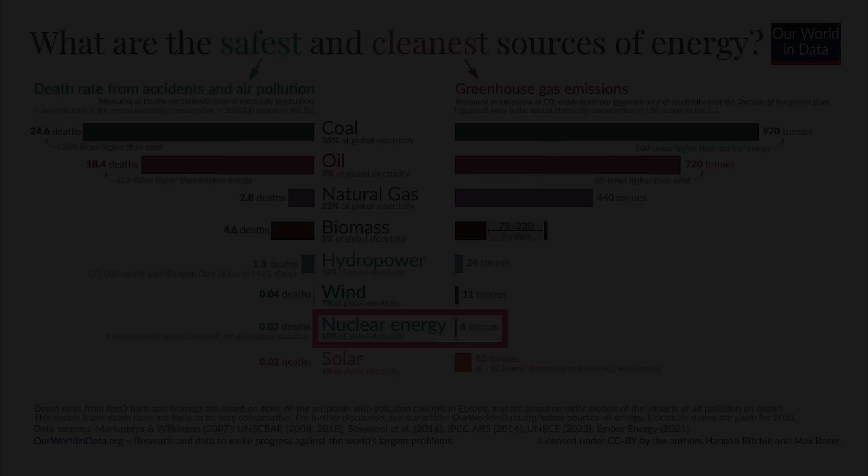For anyone who follows energy, geopolitics, or technology, it's clear that there's momentum building around nuclear energy. It's seeing growing public support, technological advances that could make it cheaper and safer, and it's the absolute champion when it comes to low-carbon energy production. The question is, will that momentum result in a renaissance for nuclear power? That's what I'll attempt to answer with this new video series.

Today we'll start by looking at the bear case for nuclear, and the best example of that is from RethinkX, which has forecasted that nuclear power production will collapse in the 2020s. In my view, that forecast is overly bearish because it doesn't take into account the role that nuclear plays in the overall grid mix, doesn't seem to factor in the cost of existing nuclear generation compared to new nuclear generation, doesn't factor in that nuclear power is the ideal power source for AI data centers, and the exponential growth in electricity demand that's expected from the broad-based push for greater electrification.

Once again, bear in mind that today's video will just address the bear case. In upcoming videos, I'll get deeper into topics like whether nuclear power will be needed when solar, wind, and batteries are a fraction of what they cost today, and the economics of next-generation and small modular reactors.

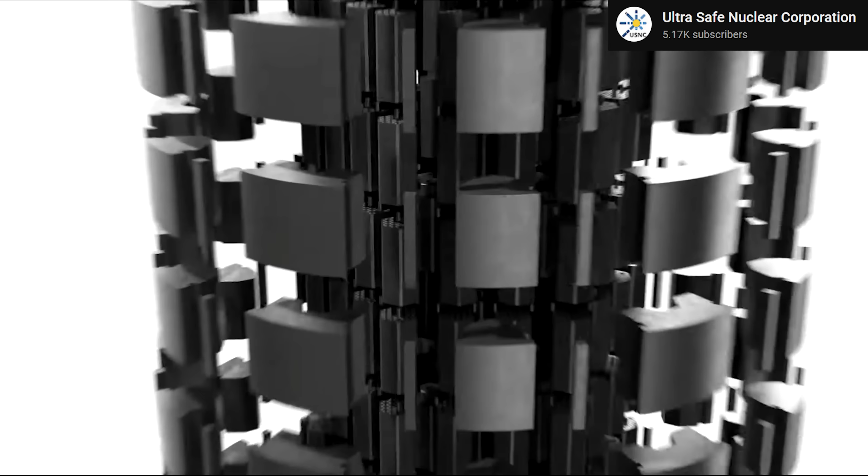To set the tone for this video series, the first point worth covering is that I'm technology agnostic when it comes to energy generation technologies. I only care about using the right tool for the job. That is, I don't believe there's a holy grail of electricity generation that'll solve every use case. So for me, the question is not which energy technology is best, because that's the wrong way of looking at the electricity grid, but rather, what are the use cases and what are the best solutions to each of those use cases? And from there, we can try to determine how much each technology will scale over time.

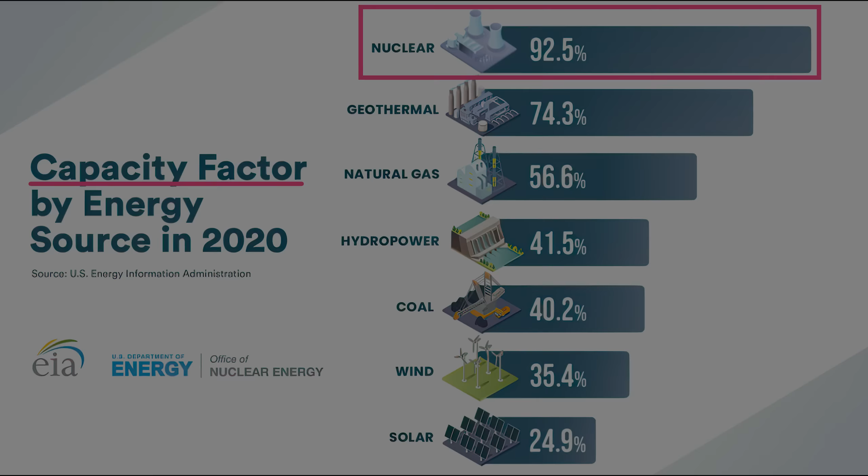In the case of this video series, I'll be focusing on nuclear energy. So let's start by taking a 10,000-foot view. There are three types of electricity generation. The first is inflexible, and the best example of that is nuclear power. The advantage of nuclear power is that it has up to around 90% uptime, which provides a solid foundation for the grid. However, the disadvantage of nuclear is that it has high capital costs. So, in order to be profitable, a nuclear plant needs to run as much as possible.

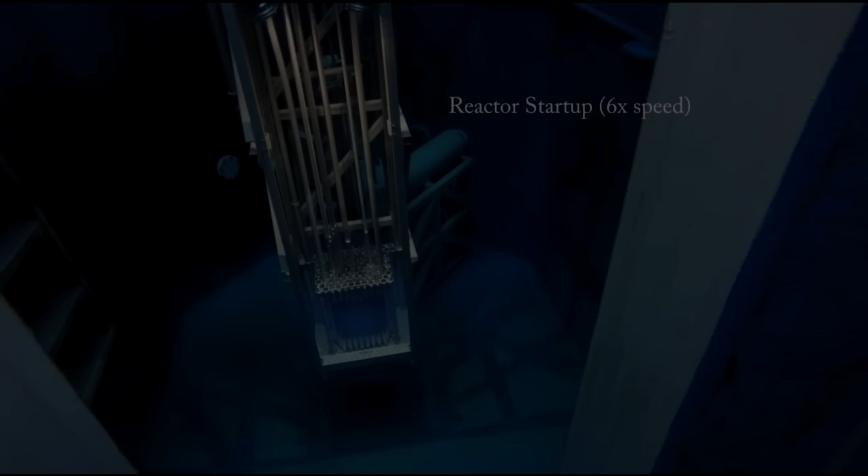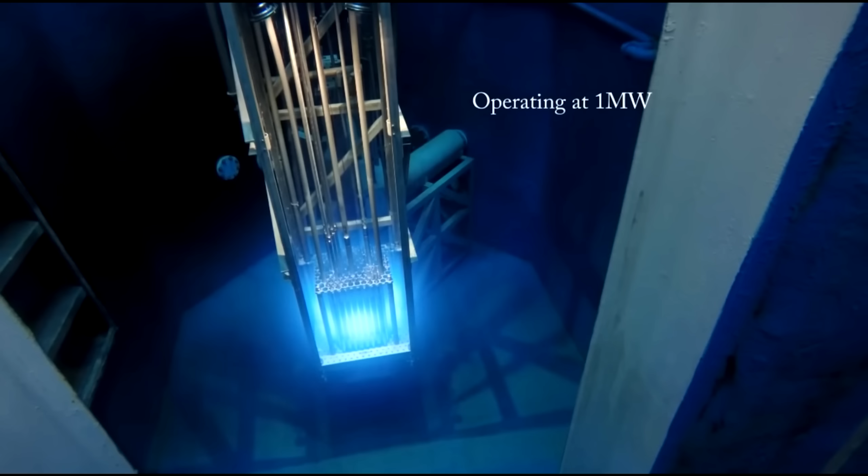Additionally, a nuclear reactor takes days to spool up and days to cool down. That means it's easier for grid operators to run nuclear continuously rather than trying to chase the daily ebbs and flows in power demand by throttling the reactor. The next type of electricity generation is flexible generation, and the best example of that is natural gas-powered plants that can adapt to demand by increasing and decreasing output.

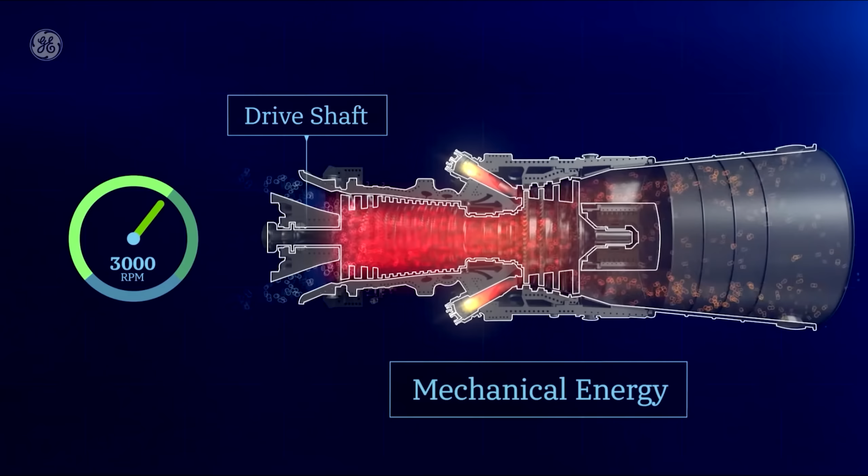There are two types of gas generation. Simple cycle gas generation has low capital cost because it uses relatively simple technology in the form of a gas turbine, but the operational costs are high because they have low fuel efficiency. That combination of qualities makes them perfect for peak power demand because they can sit idle until they're needed, then capitalize on high power costs during peak demand.

Combined cycle gas generation has moderate capital costs because they're more complex. They not only have a gas turbine, but also a heat recovery system and boiler that runs a steam turbine. That results in greater fuel efficiency. That means combined cycle gas turbines are low cost enough to operate as baseload, but they can also ramp up and down quickly with demand to serve as flexible generation.

With those two types of electricity generation, inflexible and flexible, grid operators can meet any demand while keeping costs low by utilizing the strengths of each technology. There's still one more type of generation, variable generation, and the best examples of that are solar and wind power.

They have moderate capital costs and no fuel costs, but they only produce power when the sun is shining and the wind is blowing. That means they're low cost, but in order for them to provide reliable power, they have to be combined with inflexible or flexible generation to fill in the supply gaps, which is called firming.

What all this means is that each electricity generation technology occupies a niche that it's best suited to, and the optimal solution for a reliable grid requires a variety of technologies. That technology mix can vary quite a bit depending on a number of factors like geography, interest rates, fuel costs, and latitude. Coming full circle, this is why I don't believe in a holy grail of electricity generation, and I try to be technology agnostic. It doesn't make sense to become a fanboy of one technology because it's counterproductive.

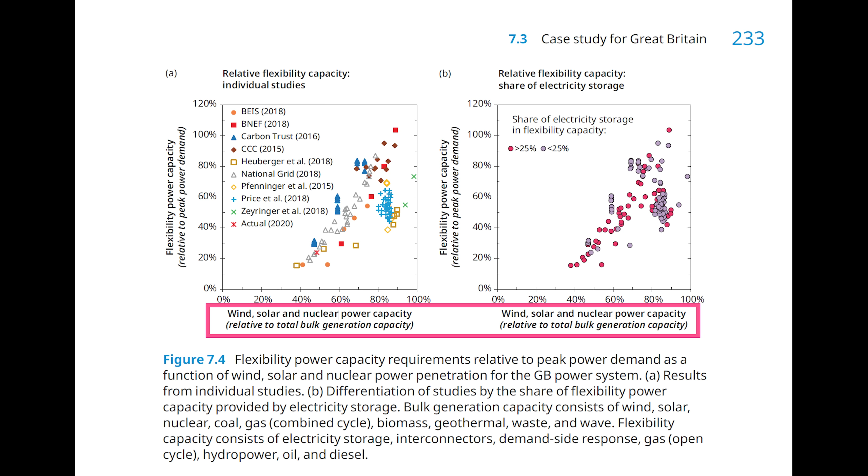For example, some people assume that somehow nuclear power is at odds with solar or wind power, or the inverse, which is that nuclear will make up for the shortcomings of solar and wind power. But in energy systems analysis, they often get lumped together. Why? Because they each have a tendency to produce excess energy. Solar power, for example, will sometimes produce more power than the grid can use on a sunny day. And nuclear power, for example, will continue to produce power at full tilt, even when demand is low. More on that in a moment.

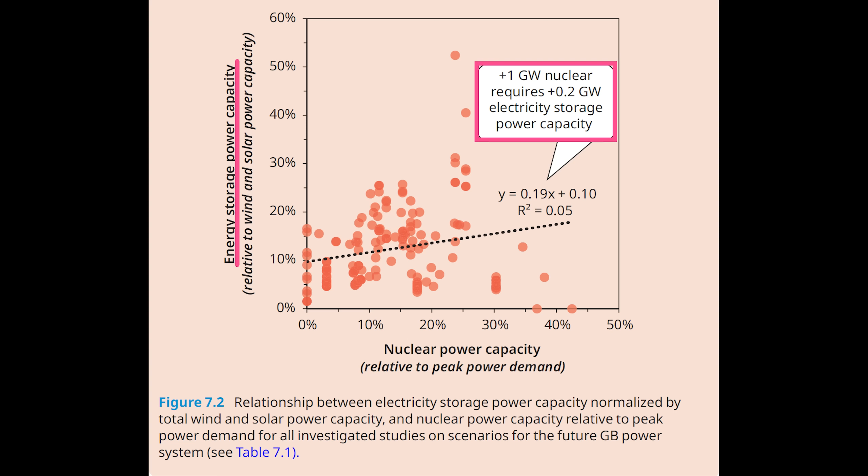What this means is that there's a positive correlation for solar, wind, and nuclear versus energy storage technologies like lithium-ion batteries, which allow the excess energy to be captured when demand and prices are low, and sold into the grid when demand and prices are high. So, the solar and wind provide ultra-cheap power because they don't need fuel. The nuclear provides a reliable baseload for when there's no sun and wind, and the battery storage makes better use of all of them. It's an ecosystem of complementary technologies.

With that context in place, let's zero in on nuclear energy. As I said in the introduction, the most bearish forecast I've seen for nuclear is by RethinkX. They expect nuclear power to collapse by 2030. The core of their argument is that newly installed solar, wind, and batteries are soon going to be cheaper than nuclear power. That means the utilization rates of nuclear plants will drop, causing the cost of nuclear power to skyrocket, which in turn will result in those nuclear plants being shut down. However, there's 4 reasons why that logic may be incorrect.

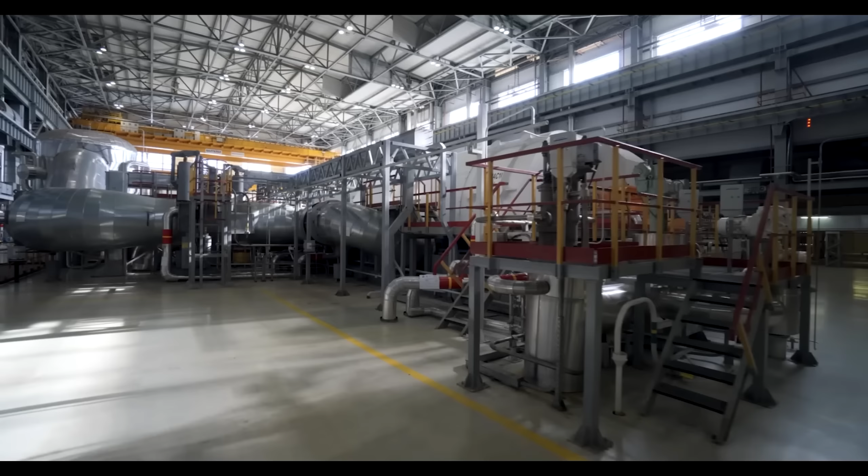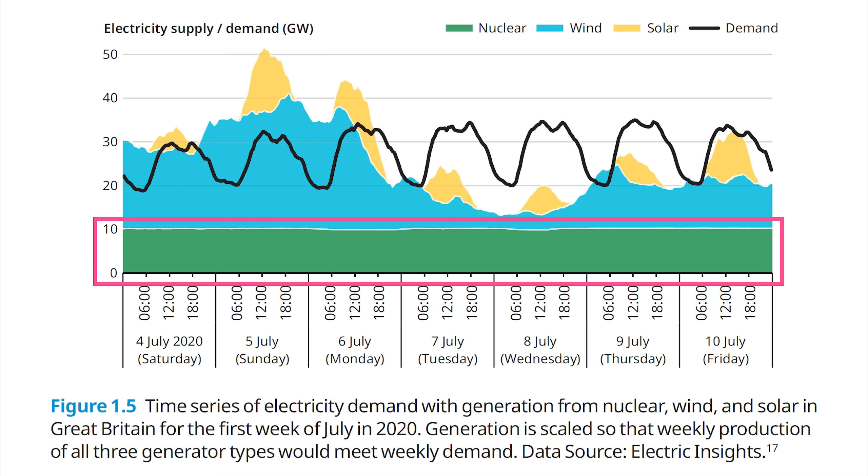Let's take a look. First, in most power grids, nuclear is treated as a must-run generation service, which means it operates at all times. Let's look at how that works in practice. As I said earlier, nuclear can't throttle quickly enough to match power demand. At night or other periods of low demand, that means the nuclear plant has to sell energy cheaply and underbid other generation technologies to continue running. That can often mean running at a loss during those periods, but it still improves the overall economics of the nuclear plant compared to throttling or shutting down. That's because the low fuel costs and high capital costs of nuclear plants mean they lose even more money if they're just sitting idle.

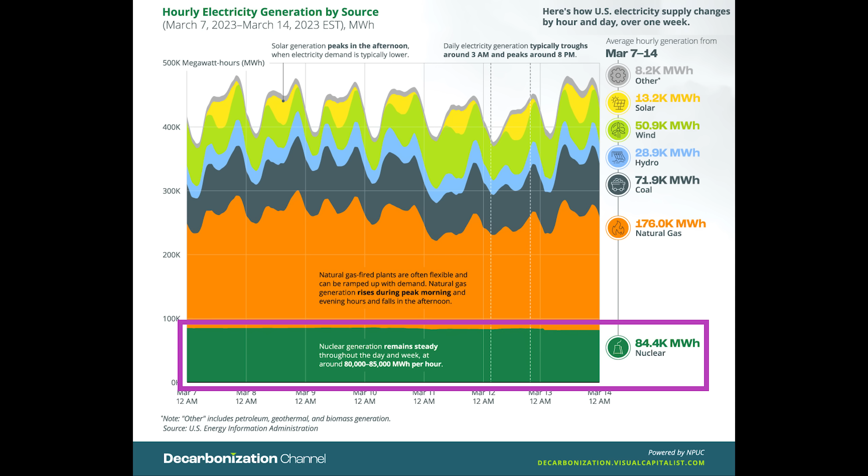As a side note, even if nuclear power is more expensive, the continuous and stable power generated by nuclear plants may be worth a certain price premium that could keep them around on the grid longer than expected. How much that premium is, I'm not sure, and how long it could save nuclear plants from being mothballed, I don't know. But it is worth considering not just the price of electricity, but also the value it provides for grid stability.

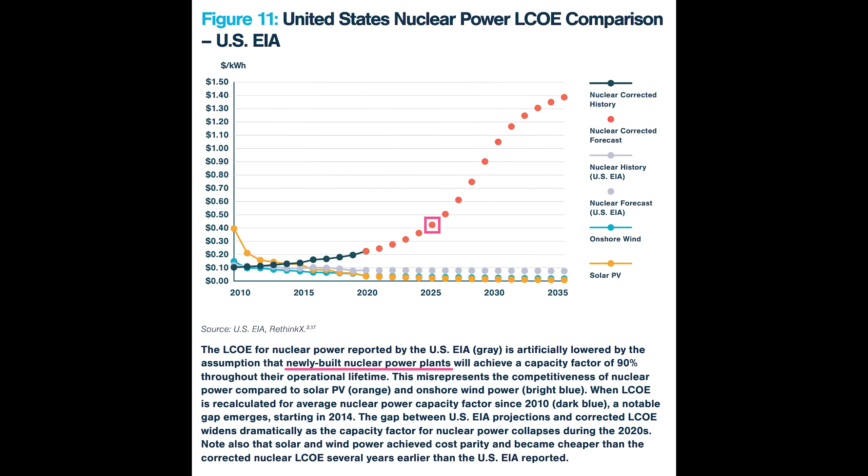The second issue with RethinkX's analysis is that they appear to have focused on new nuclear power plants and ignored existing nuclear power plants, which have vastly different economics. They estimated that the cost of new nuclear generation in 2025 would be about 43 cents per kilowatt hour, or $430 per megawatt hour.

The most recent data we have from Lazard, published in June of this year, indicates that it's turned out to be $142 to $222 per megawatt hour, or 14 to 22 cents per kilowatt hour, so about half the cost that RethinkX had predicted. What about fully depreciated nuclear generation from existing nuclear plants, which makes up almost all of the nuclear generation in the United States?

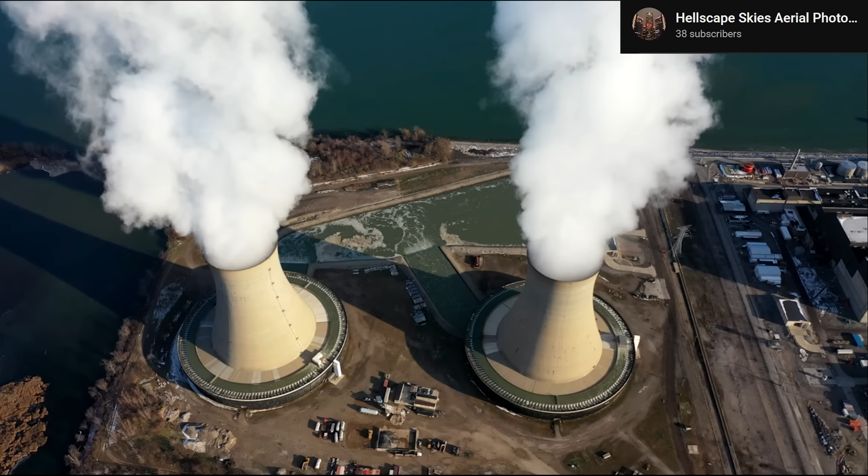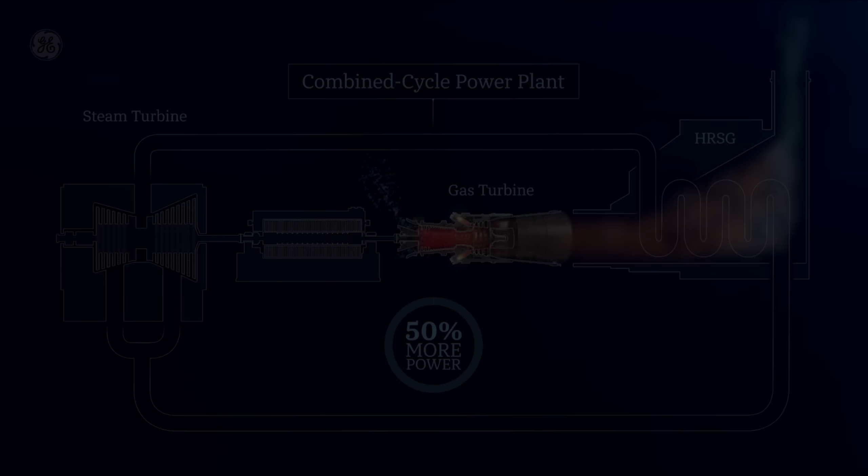According to Lazard, on average, the energy from those nuclear plants has a levelized cost of $32 per megawatt hour, which is about 3 cents per kilowatt hour. For comparison, at the very low end with generous assumptions, onshore wind and utility-scale solar can be as cheap as $27 or $29 per megawatt hour. But again, that's with generous assumptions. As I said earlier, due to the fact that solar and wind are variable, they require other generation technologies to buffer and support them, which adds to their cost.

The dark blue and light blue bars on screen show the cost of building new generation from solar and wind, with and without tax credits, across different energy markets in the United States. ERCOT is, for example, the Electric Reliability Council of Texas. The tan-colored bars above the dark blue and light blue bars represent the additional firming cost.

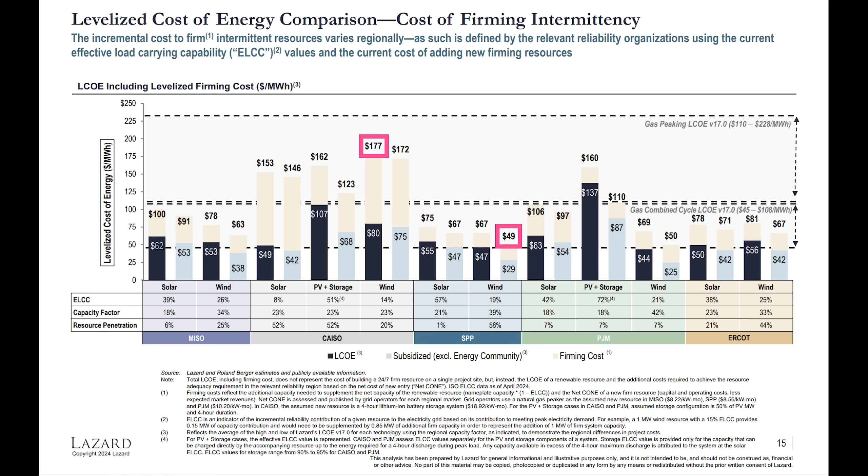As you can see, with the firming costs factored in, solar, wind, and batteries cost between $49 to $177 per megawatt hour, or about 5 to 18 cents per kilowatt hour. That's considerably more expensive than the $32 per megawatt hour, or 3 cents per kilowatt hour for fully depreciated nuclear.

That is, the competition from solar and wind generation isn't going to be shutting down nuclear plants at scale anytime soon. Yes, there are some nuclear plants that have been shut down in recent years due to price competition, but for the most part, it wasn't due to price competition from solar and wind generation. Instead, it was due to competition from natural gas generation, which, thanks to the fracking boom for fully depreciated equipment, now costs $30 per megawatt hour all in because it's inherently firm. Furthermore, gas generation has the benefit of being able to spool up or down to match demand.

That is, although RethinkX is correct that installing new solar, wind, and battery generation is cheaper than installing new nuclear, it's going to be years before the same is true for fully depreciated nuclear plants. In fact, rather than a collapse in nuclear generation, it's looking increasingly likely that we're going to see nuclear production increase in the next 5 to 10 years. Why? Let's take a look at the third issue with the analysis from RethinkX. Their paper was written in 2020, before the AI boom.

Goldman Sachs estimates that the power demand from all data centers globally was 500 terawatt hours in 2024, and that will more than double to about 1,050 terawatt hours by 2030. That number's probably conservative, but let's run with it. The average nuclear plant has a capacity of about 1 gigawatt, and assuming a utilization rate of 90%, that's 900 megawatts. Multiply that by 365 days per year and 24 hours per day, and the result is roughly 8 terawatt hours of generation per year.

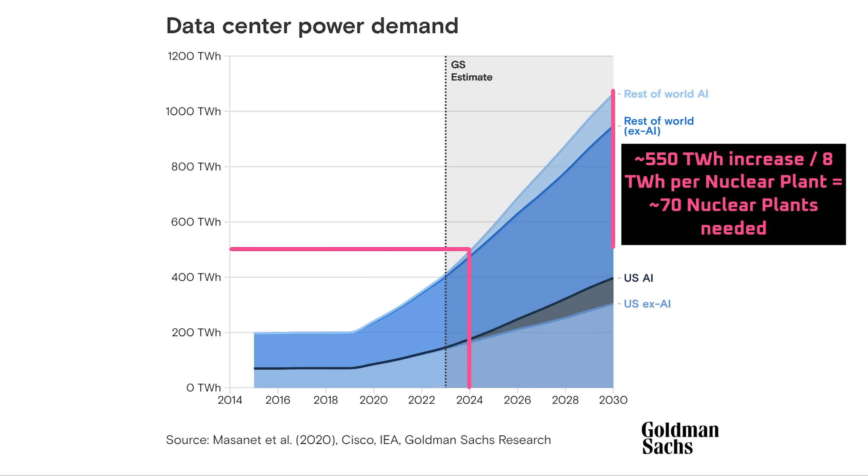If the electricity demand from data centers increases by roughly 550 terawatt hours globally in the next 5 years, that's about 70 nuclear plants that would be needed by 2030. Yes, only about 20% of that power demand will be from AI, but that will only accelerate over time. Additionally, while it's true that AI data centers can use energy from any type of generation, and will be, AI data centers and nuclear power are a great match for each other.

That's why Microsoft announced that they're restarting the Three Mile Island nuclear plant to power their AI data centers. They could have instead chosen to invest in solar, wind, and batteries or natural gas, but they didn't. Why is that? Some people would suggest it's because the plant is eligible for hundreds of millions of dollars from the zero emissions tax credits. However, other forms of energy generation are also eligible for tax credits, such as biomass, wind, and geothermal. So it still doesn't explain why nuclear is the preferred generation for AI data centers.

Others might assume that restarting Three Mile Island would be quicker than building new generation of other types, but that's not necessarily the case. It looks like Three Mile Island isn't going to be back online until 2028, which is 4 years from 2024 when Microsoft announced the deal to restart the facility. 4 years is enough time to bring completely new generation online from other sources. With all that in mind, in my view, the reason why Microsoft is using nuclear power for their AI data centers is threefold.

First, as I said earlier, fully depreciated nuclear power plants offer some of the cheapest power available, and it's likely going to be years before solar and wind with firming can compete at that price point. Microsoft could also build new natural gas generation, but that runs $45 to $108 per megawatt hour, or 5 to 11 cents per kilowatt hour.

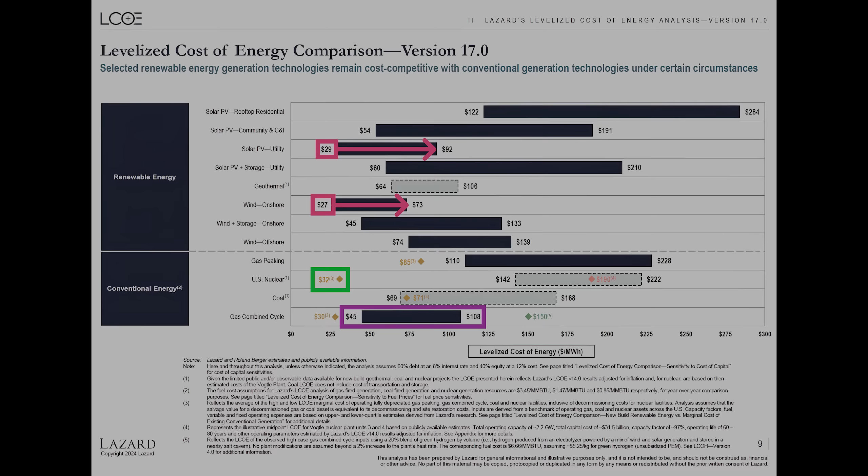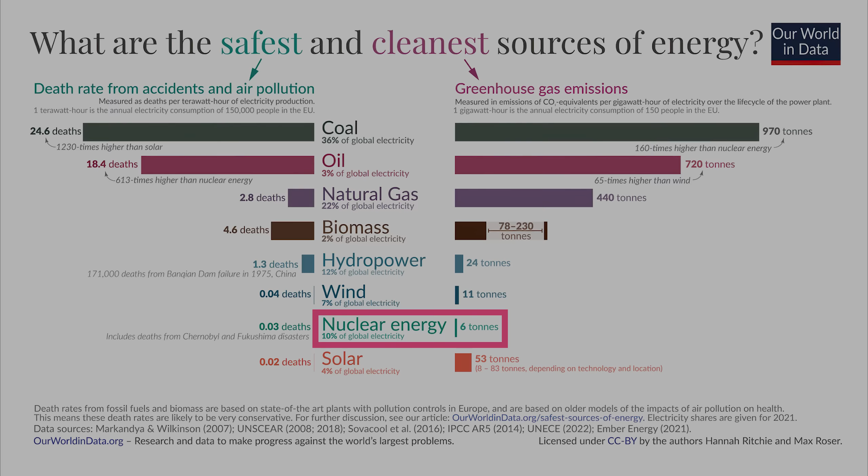Second, nuclear power has the lowest carbon emissions of any energy generation technology, which reduces the public relations risks of building out power-hungry data centers. Yes, they will catch some flack from the people who still have apprehensions about the safety of nuclear, but the majority of Americans now support nuclear power.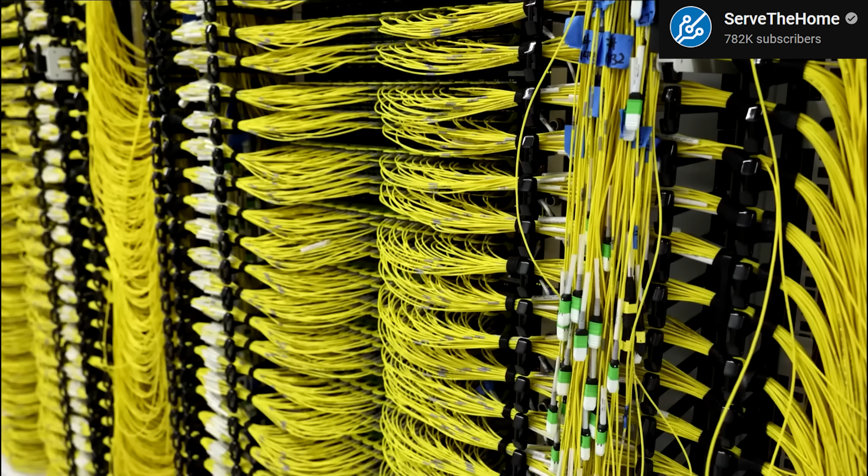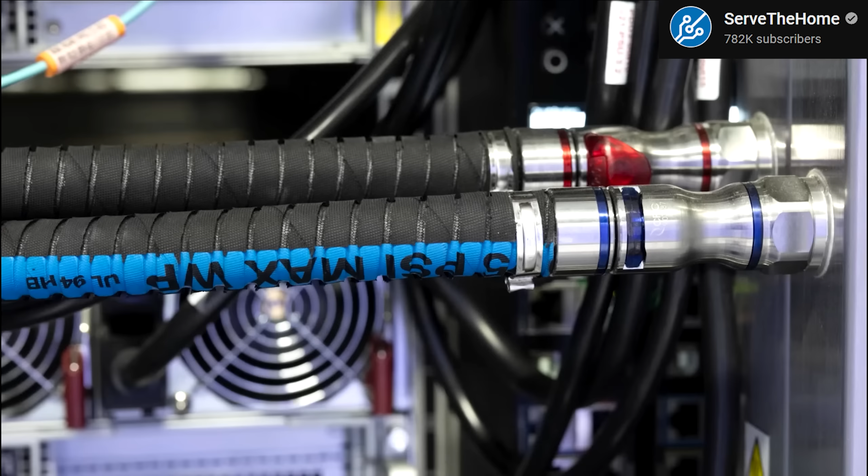Third, as I said a moment ago, AI data centers and nuclear are a great match for each other. Both have high capital costs and need to run as much as possible to maximize their commercial viability. AI guarantees large and steady power demand 24 hours a day, 7 days a week, and 365 days a year, and those are exactly the economics where nuclear works best.

The last issue with RethinkX's analysis is that we're seeing massive revisions upward in the growth of the energy market in general. After years of stagnation, the energy market in the U.S. is expected to expand rapidly due to not just the all-devouring energy needs of AI data centers, but also broad-based electrification for technologies like EVs. Due to that, energy demand is expected to double or triple by 2050.

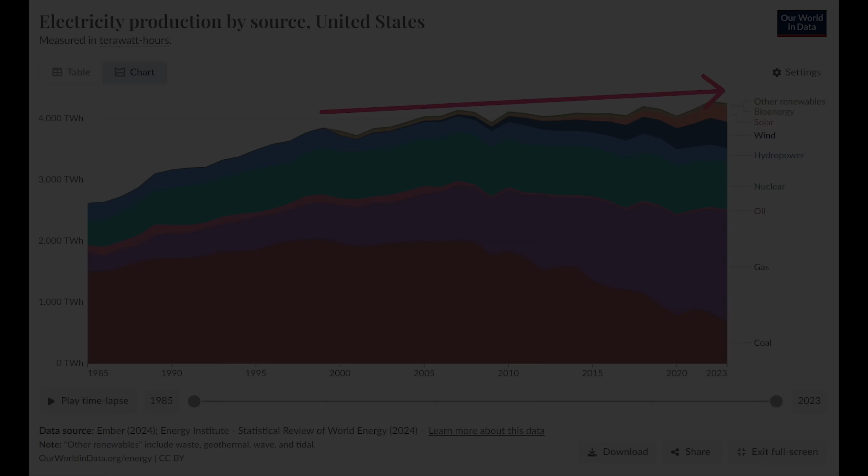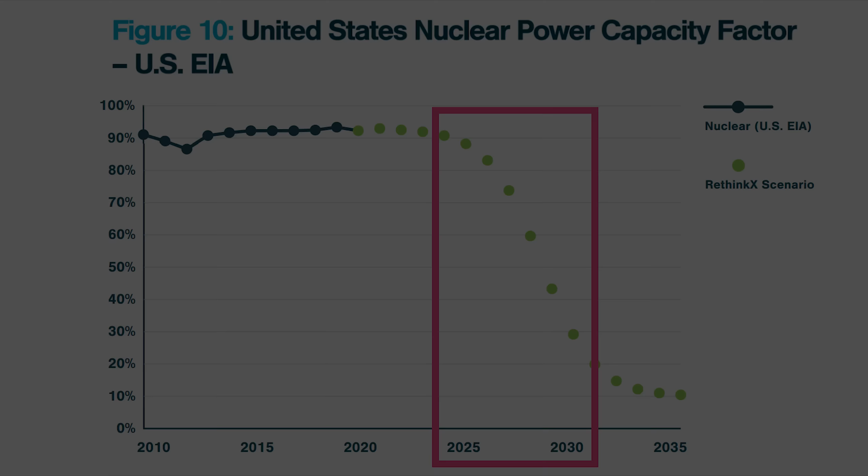As I showed in the last video of the grid storage series, RethinkX correctly forecasted that the price of solar, wind, and batteries is going to plummet thanks to the effects of scaling. If electricity demand was expected to remain flat in the next 5 to 10 years, I'd say their forecast that nuclear would be displaced in the next 5 to 10 years by cheap solar, wind, and batteries would have a higher likelihood of occurring because less demand means more price competition, and the cheapest power would win out.

However, if power demand ends up growing by 2 to 3 times in the next 25 years, that could have 3 impacts. First, despite lower generation costs thanks to solar, wind, and batteries, electricity prices could increase if the build-out of generation capacity, and therefore electricity supply, ends up chasing electricity demand.

Second, on that note, a shortage of electricity generation or higher prices might slow the speed that older electricity generation technologies are removed from the grid, or even see them reopened, which is exactly what's happening with Microsoft and Three Mile Island. Third, higher electricity prices could mean there's a market opportunity to not only restart mothballed nuclear facilities, but also spur the build-out of next-generation nuclear facilities that have high initial investment costs.

In summary, contrary to the bear case, nuclear power isn't going away anytime soon. Almost all of the nuclear facilities in the United States produce energy from fully depreciated equipment at $32 per megawatt hour, which, with all costs considered, is some of the cheapest available. Yes, by 2030, the price of solar, wind, and battery systems are expected to drop by over 50%, which, even including firming costs, will bring them into price parity or make them cheaper than nuclear. But there are other factors at play that'll likely keep existing nuclear plants operational for decades to come.

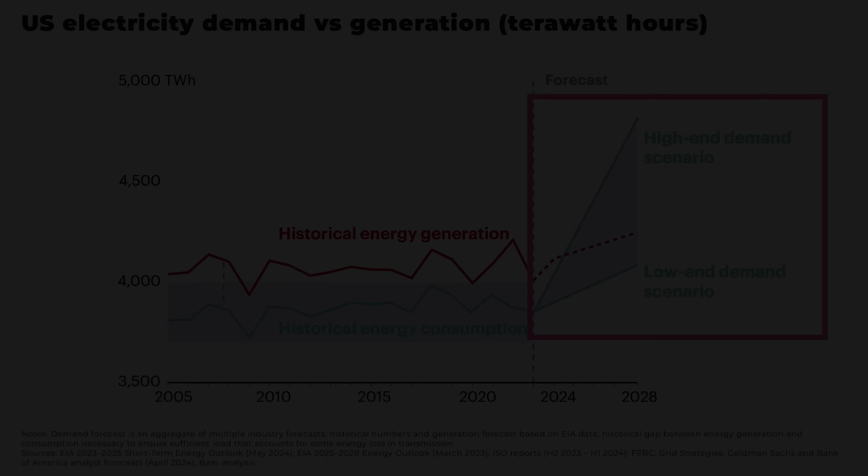The first is the AI boom, which is well suited to using nuclear power, and that demand will only skyrocket in the coming decades. Microsoft's agreement at Three Mile Island is, for example, 20 years. The second is that electricity demand in general is expected to double or triple by 2050, which could mean that electricity supply lags demand, meaning higher prices, meaning that more expensive generation technologies could remain operational for longer.

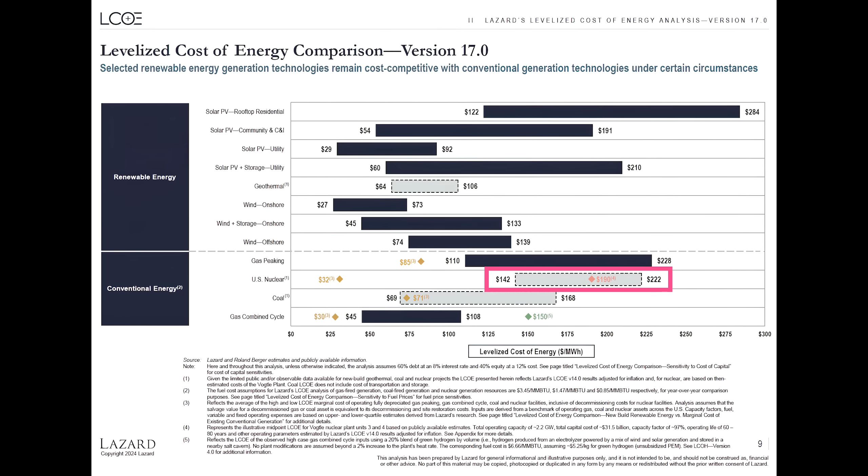However, nuclear power from new generation facilities is a different story because in the United States, it costs $142 to $222 per megawatt hour. So the key question to answer, which I hope to do in the next 2 videos of the series, is in the coming decade, whether new nuclear plants and next-generation nuclear reactors have any real chance in the face of competition from ultra-cheap solar, wind, and batteries.